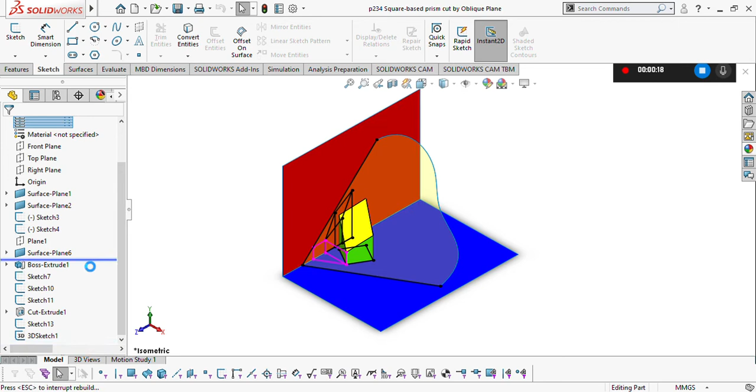So you start off with your actual oblique plane there, and you have your vertical trace, your horizontal trace. After that then you would draw in your solid there. So you can see I've drawn it just before you actually cut it. So you can see there in elevation, that's it before it's cut, and in plan you'll have that square shape.

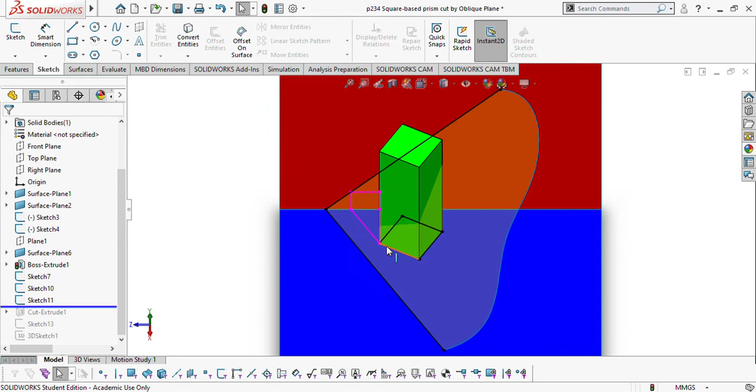After that then, just showing how we take one of our points over and up. So we go parallel to our trace there until it hits the XY line. We take our line straight up. After that, where that line hits the XY line, we take that straight up and across, and we continue our vertical line straight up to find out where the height of that cut is going to occur. So you can see before it's even cut, it's going to hit it roughly about there where the colour changes on the plane.

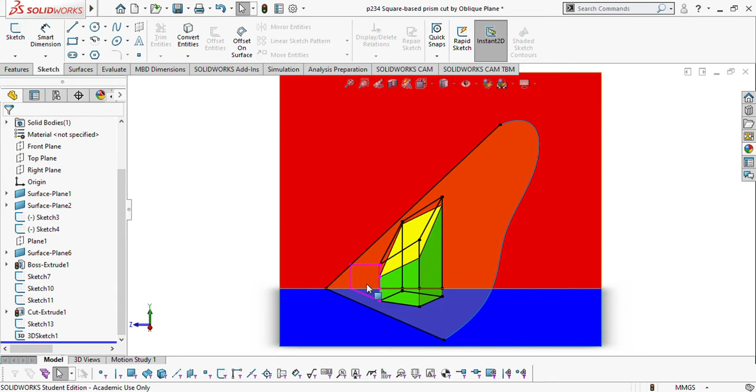After that then I've actually put in the cut showing the exact point of where it actually occurs. And then I've just drawn the rest of it in. So I just did one point instead of taking them all because it'd be very confusing seeing all the purple lines being taken up and across. I just showed about one. You can see where all the points occur then as a result. And that's your shaped outline. And you look in plan, the whole surface is cut as well. You can see in yellow where the cut occurs. So that was how to do that one there.

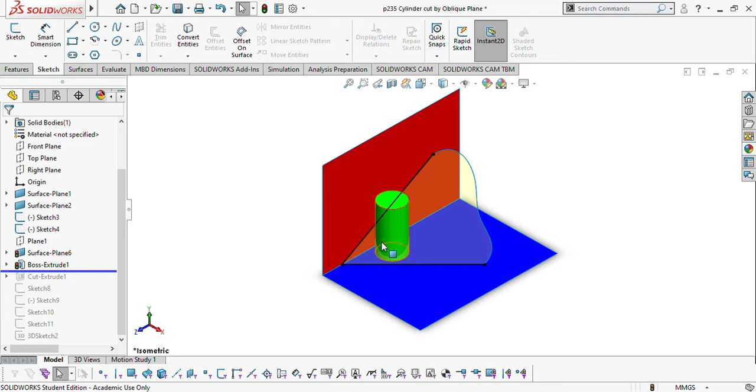The next one was the cylinder. I can get it just to open here. There we go there. So the cylinder, so the same idea again. If I just roll it back to what you would start off with. Too far back. Just there where you'd have your traces drawn in again. And then we have our cylinder drawn in fully there. And then when it's cut by the plane, it leaves that shape behind there.

I've just once again shown an example there of one of my points. If I just look down, first of all on my plan, you can see there I picked a point on my cylinder, took it up parallel to the trace there, and then straight up. And where it hits the XY line, we take that straight up, across, and we continue that line straight up there, and it gives me a point. And you can see our elevation there. When you plot enough points, you're able to draw your freehand curve. And that's what it looks like in elevation and plan.

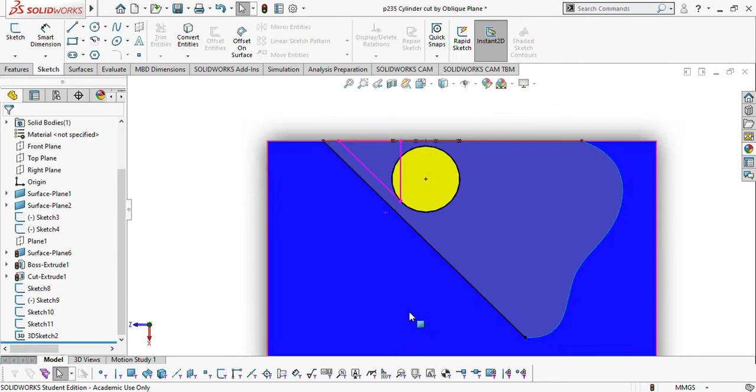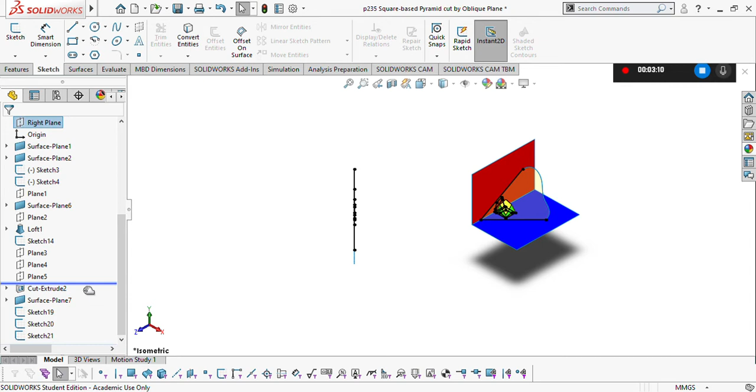And then the last one was the square-based pyramid. If I just get it to load there. There we go. So I just scroll it back just to do the same idea again. So you start off with your oblique plane. If I just zoom right in there so you can see. You can see our trace is drawn in. After that then, I've drawn in the pyramid before it's actually cut. And the plan view there.

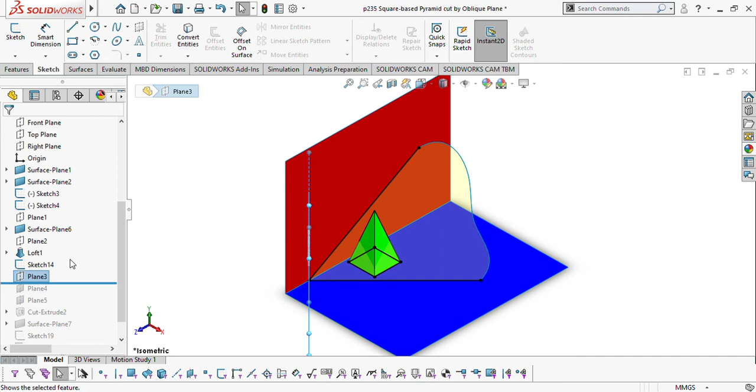And then the difference with this question is we can't actually take our edges out, over and up. We won't be able to actually project our points because they're all sloping inwards. So what we need to do is actually take an auxiliary view to solve this part of the question. So what I've done is I've created a plane here, and just like we will have done to find the true inclination, if you look in to this side here where you see the actual auxiliary view of the plane, by having that line there you see an edge view.

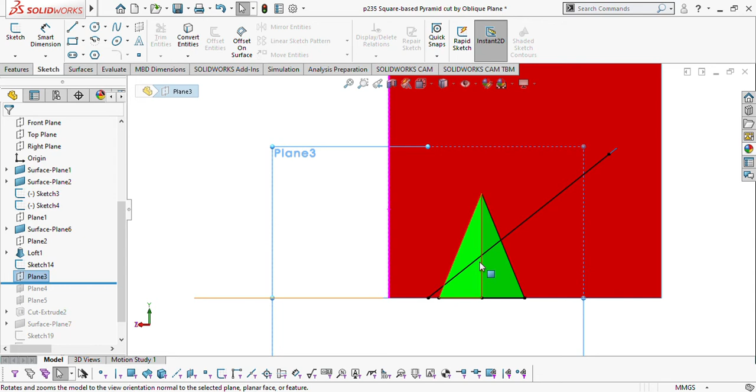You can see exactly where all the cuts occur. So at this edge here it cuts here. For this one, the front, and you can just tilt it up there, and the back, you can see it cuts at that point there, and you can see along this one it cuts here, so you get your heights there as a result, so you can actually take your points.

It's very important for that one as well to take an auxiliary view, because if we look in at the plan, we wouldn't be able to actually take our points down here, because we're looking in at this angle here, looking in along this way. We won't be able to see where our height is hitting here and here, so that's why it's important to have an auxiliary view. We can see where our points hit this line here and here, but we can't see how far back it's going to hit, so that's why we have our height. So we'll be able to take it into our elevation and then finish off in our plan as well.

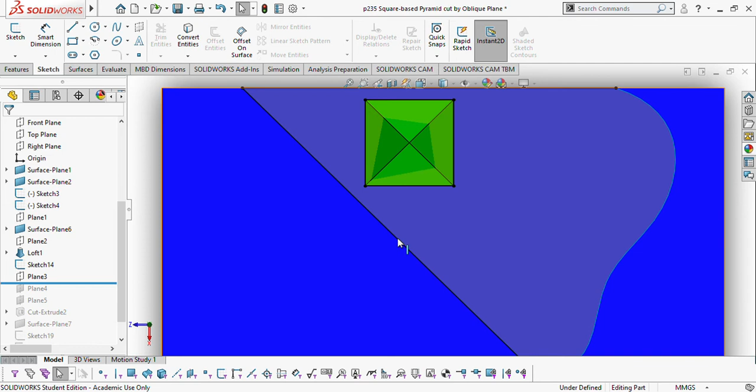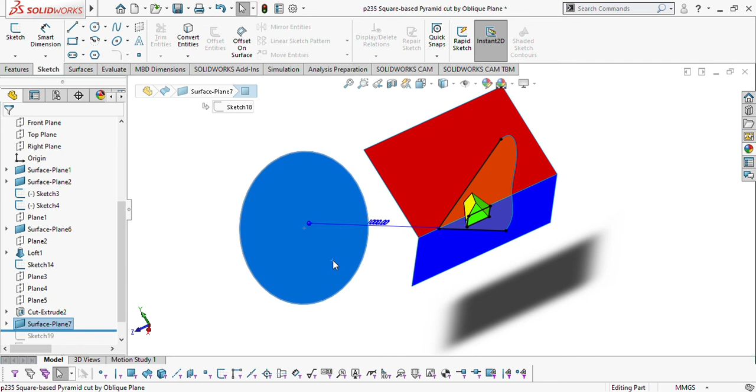So if I just go back to our auxiliary view, I should have a cut made here. So yeah, you can see there, if we look in, I've already done the cut now there as well, showing where it hits it. If I look in perpendicular to our auxiliary view there we go. You can see there all the points going to cut along, and then I've actually projected that onto the surface there, so you can see that's your auxiliary view you would have with your x1, y1, your line showing your oblique plane, and then where the cuts occur there.

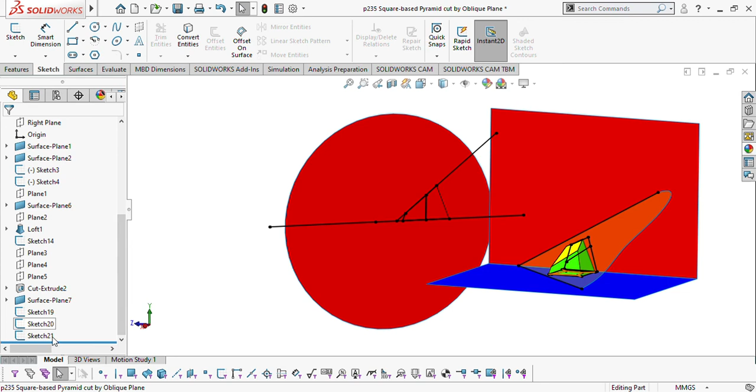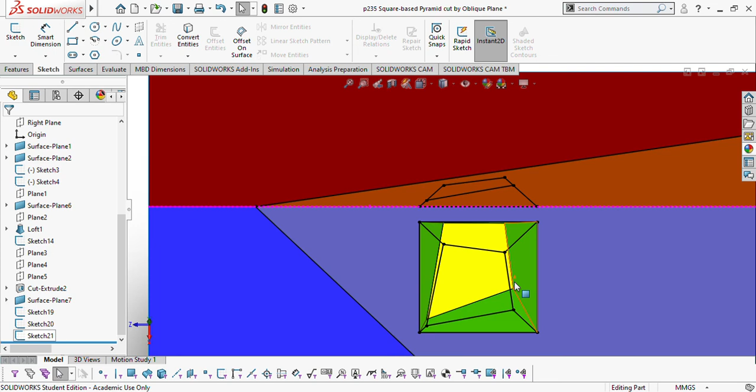And then what you can do then as a result is actually be able to take your points down and then up into your elevation to get your heights here, here, here, and here. And then for these two, as I was saying to you, how we can't see in the auxiliary, on these two here. If we look at our elevation, we can have our height there, take it straight down, give us this point here. And then for this one here, when we take that height there straight down, it'll be able to give us that point there as a result.

So hopefully that video helps anybody who would have been stuck on that.